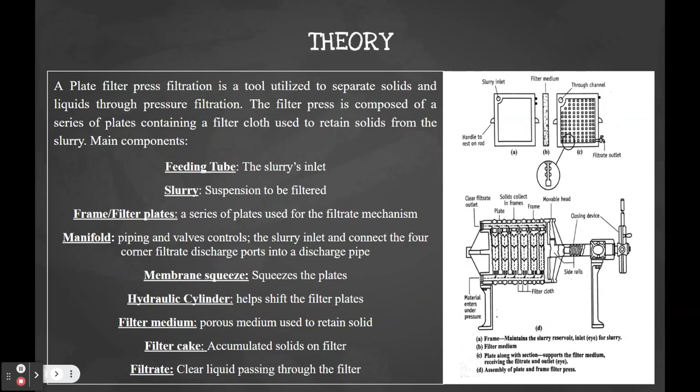Now, if you look at letter C, the plate has a filtrate outlet. And because this tool is composed of a series of frame and filter plates, each plate has a filtrate outlet. This allows for all the filtrate to be discharged into one single discharge pipe. We also have a membrane squeeze, which squeezes the plates, a hydraulic cylinder, which helps shift the filter plates, a filter medium, which is a porous medium used to retain solids, a filter cake, which is a product of all the solids accumulated, and a filtrate, which is the clear liquid passing through the filter.

So what is the process and how does it work? First, the plates are clamped together with the help of cylinders that align the plates and allow them to remain closed with the help of pressure. Then slurry enters the feeding tube via pressure and travels into the frame and into the filter medium. Once the slurry has entered all the cavities, the membrane squeezes the plate and forms the filter cake, thus separating the solids and the liquids.

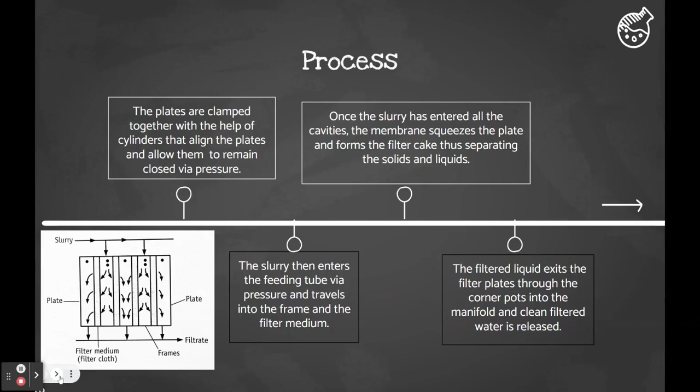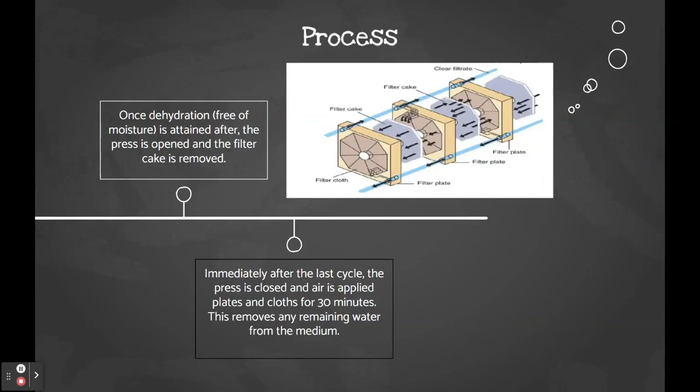Once dehydration is attained, the press is opened and the filter cake is removed. And what I mean by dehydration is that the filter cakes are free of moisture. The filter cake must be free of moisture because if they attempt to remove it while it's still wet, it may crack or break. Now, immediately after the last cycle, the press is closed and air is applied to the plate and the cloth for at least 30 minutes. This removes any remaining water from the medium. This specific tool likes to work in batches, so it's essential for the cloth to be dry before putting it through another batch.

If you can recall from previous experiments conducted in class, specifically the recrystallization experiment, after collecting the crystals, we had to wash them in order to remove any impurities. Well, the same concept corresponds to the washing of cakes. So the filtration mechanism is performed as described in the last slide. However, when the frames are filled with cake, the washing plates are closed and wash water is pumped, which then travels into the frame and into the filter cloth. Once washed, the water escapes through the outlets.

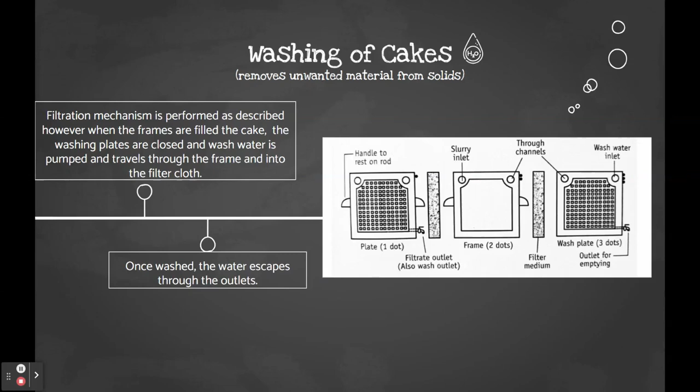Here, in the picture on the right, you'll be able to see that there's a wash plate, which contains a wash water inlet and an outlet for emptying. Now, not all the machines have this specific extra wash plate, but for those that do, this is how it would look. This video will give you a better visualization of how the process actually occurs.

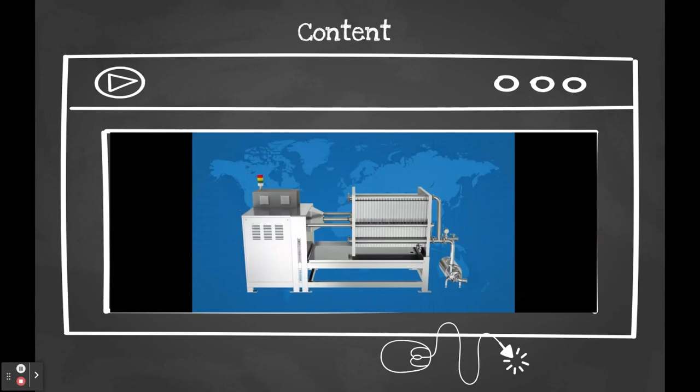Here you can see the arrangement of the plates and the frames, starting with the end plate, filter media, filter plate, filter media, and a filter frame. This arrangement continues until forming a series of plates and frames. Here you will see the slurry entering the feeding tube.

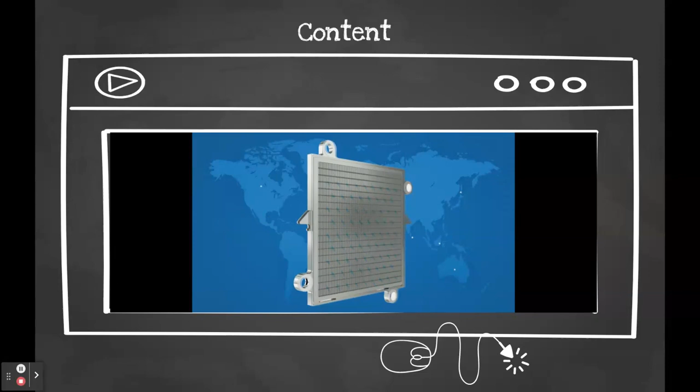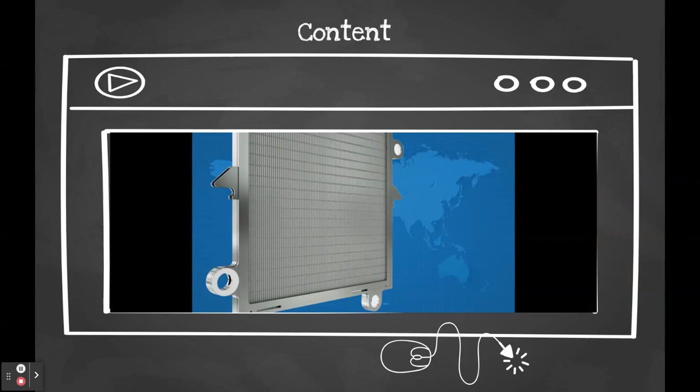This part shows how the slurry enters each inlet and goes through each surface. This is where the cake should be forming, although it's not shown. And the blue arrows indicate the liquid being filtered and released through the corresponding outlets. The cycle is repeated for each batch.

So what are the applications of this tool? In the pharmaceutical industry, it is used to ferment liquids along with enzyme preparation. In wastewater treatment, it is used to filter solids settling in a pond as they lose their ability to clean water over time due to solid buildup. In the food industry, it's used to obtain vegetable oil from seeds. And in wine and beer production, it is also used in concrete cement production, along with the mining industry, specifically to filter the silver, gold, zinc precipitation generated in the Merrill-Crowe process. An example of when this tool would be utilized is for the removal of cell broth from fermentation medium.